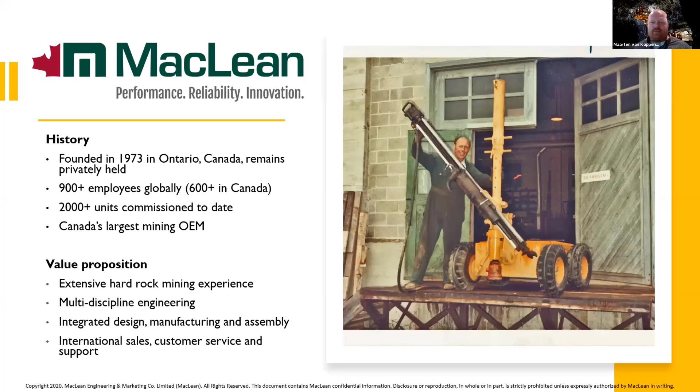We now have about 900 employees all over the world, and we've got over 2,000 rigs commissioned. All of our engineering is still in-house, and we still do a lot of the manufacturing in-house as well. We have, for the size of our company, a pretty significant inventory of spare parts. So that's sort of where we stand. We pride ourselves in providing solutions for the underground hard rock market, ranging from something we can produce in large numbers to one-offs as well. So that's basically MacLean in a nutshell.

As you would expect, we operate primarily in our own backyard in Canada, though we have locations elsewhere. We just opened up a branch in Elko, Nevada, plus South America, Australia, and particularly our Africa branch has been very successful over the last couple of years in expanding the business. So our center of gravity is starting to move a little bit across the border, which is good. And we've been growing quite a bit.

Part of the expansion is that we also now have our own test facility in Sudbury, a couple hours north of Toronto. It's a decline that we can use for our own internal testing, which is great. For a company our size, you kind of need a facility like that to work on your product development. We're happy to have this and run our tests.

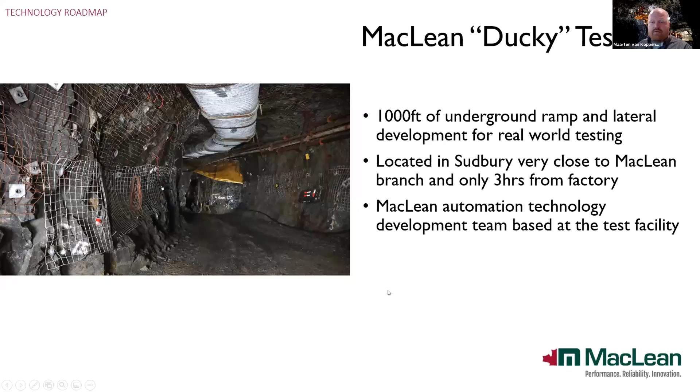So what do we do? We basically have three different product lines. They range from utility vehicles - boom trucks, etc., personal carriers, scissor decks. We have a ground support line, so we've got our famous platform bolter, a shotcrete rig line - sprayers, mixers, transmixers - and then our ore flow suite. So basically anything from a block holer, secondary ore reduction - I think is the technical term - to water cannons, rock breakers, scalers, that all falls in this category.

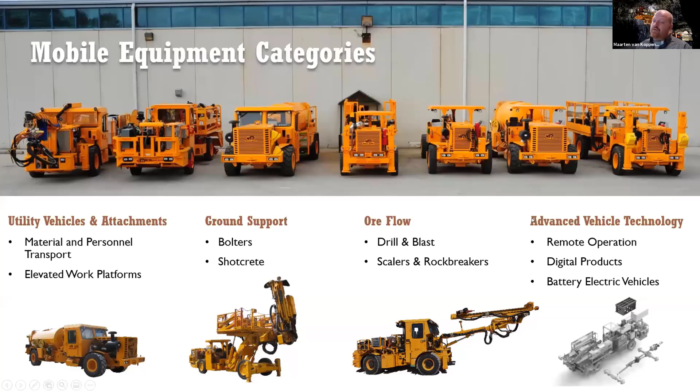What kind of goes over top of all three of those product lines is our advanced vehicle technology. The way we see it, we've got three verticals that touch on all of our products. From automation - this entails line-of-sight remotes all the way up to tele-remote and beyond. Then we've got our digital systems - that's our telemetry, but also our virtual reality training modules that we're coming up with. We just completed our Bolter virtual reality training kit, and also the interfaces with the operator on the machine. There's a lot of work that can be done there.

And then the one we'll focus on a little bit more is electric vehicles, which spans across all three product lines. We believe that ultimately, whatever the future might look like, we know it's going to look different than it is today. And we believe that all three of these verticals will help us move into the next generation of mining, whatever that looks like, with a pragmatic view. Yeah, we're quite keen on moving there. Like I said, whatever that might look like.

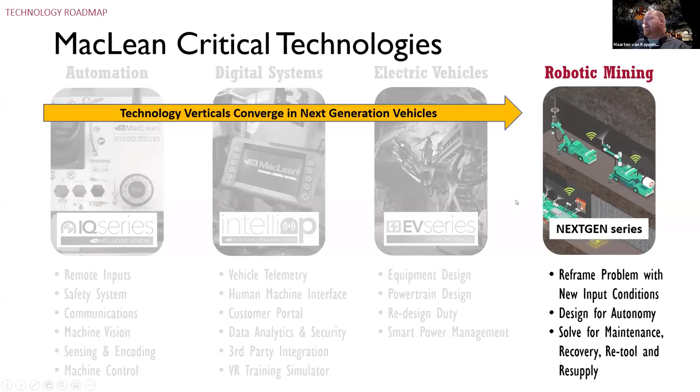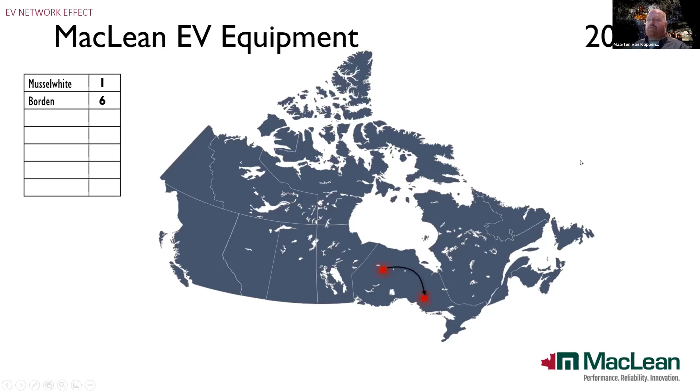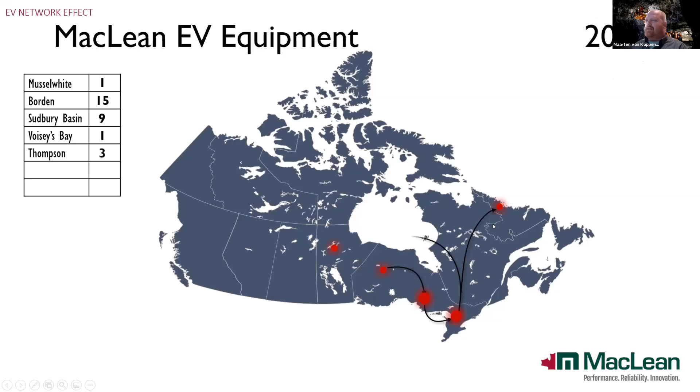When it comes to electric equipment, we started off with our first unit in 2016. It was a bolter that went to Musselwhite, and then Borden started in 2017 with 6 units. That turned into 15. We sold our first unit into Sudbury. That kind of expanded out to Voisey's Bay. Then we sold a couple in Thompson. Kidd Creek came along in Timmins, and we just completed a successful trial at New Afton in BC.

What we're kind of seeing is this network effect, where wherever we go, the good news tends to spread. The other good news and problem at the same time is that, for example, the unit that went to New Afton is our demo unit. We're seeing quite often that our demo units tend to stay at that site and get sold instead of moving around to different sites. So that's a really good problem to have, because we just need to keep building our demo units, I suppose.

So we're now at 9 different mine sites. We've got probably close to 40,000 operating hours since we launched, and we're just aching to get across the border now, to be honest. There's a lot of interest from various companies, and we're keen to move forward with this.

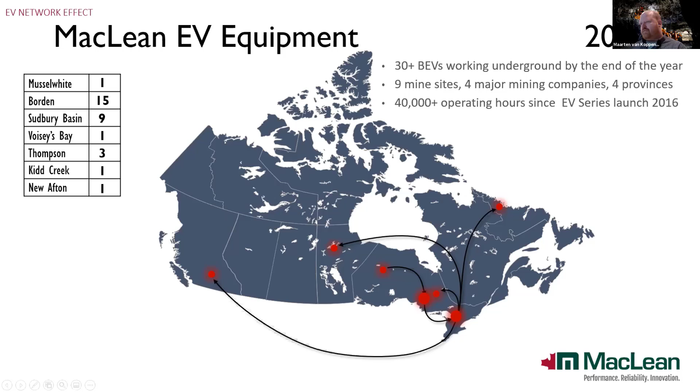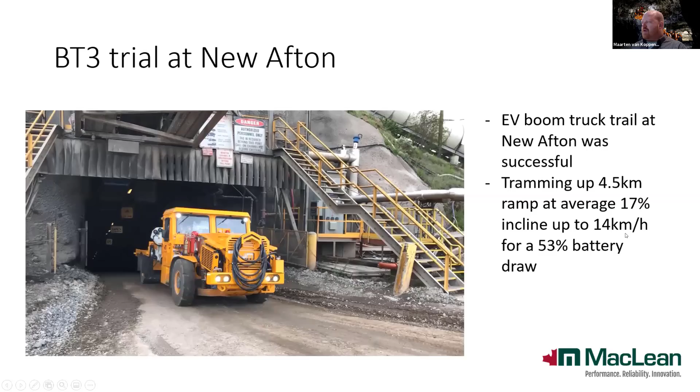The speed up the ramp was actually quite a bit higher than what they were used to with their diesel unit. At an average 17% incline, they were able to drive up the ramp empty at 14 kilometers an hour, which drew down the battery by just over half. Granted, it is a longer haul.

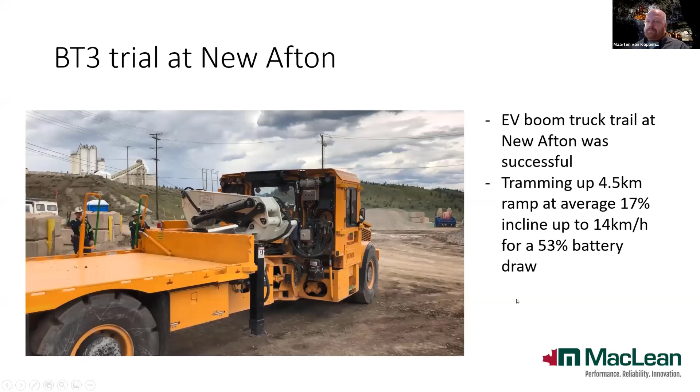So they were quite happy with it, and anecdotally the time saved on their way up the ramp was about 20 minutes compared to the diesel unit. If you do these trips often enough, it will add up, and that's something we've seen quite a bit with our customers.

The majority of our fleet right now is between 1.5 to 3.5 years old. And what we're seeing for battery degradation with the batteries that we have is a 2 to 5% degradation over that time period of just over 3 years.

We follow the battery manufacturer's recommendations that the battery should typically be retired at 20% degradation. I'm sure you can't quite extrapolate, but seeing these numbers makes us feel quite confident that these batteries should last for a good amount of time.

There's a bit of a difference between types of machines. Bolters are typically a little bit easier on the battery because they don't draw down as frequently, whereas with boom trucks you see that a bit more often. So that's where you see some of the differences.

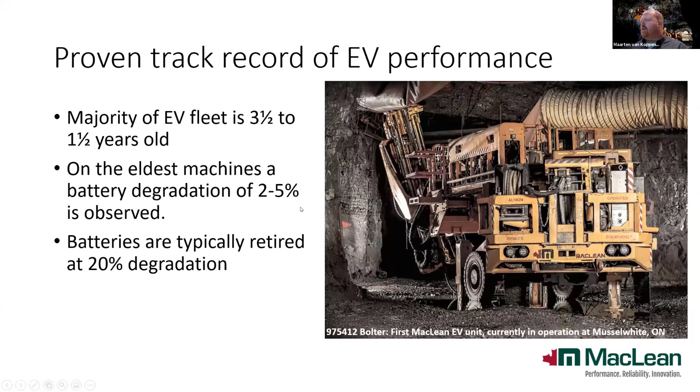In our view, what's nice about using utility vehicles is typically you go down the ramp loaded, so you can use that potential energy from gravity and put it in the battery to a large extent. And then when you unload, you go back up empty. That's a typical way of how machines operate, and so that makes it for a good case.

And then on top of that, in case of a boom truck, for example, if you spend 15-20 minutes unloading, that's a good opportunity to plug in while you're doing that and top up the battery. Every little bit helps. Our batteries don't have a memory, as do most chemistries, at least the more advanced ones as far as I know. So that makes it for a pretty good application.

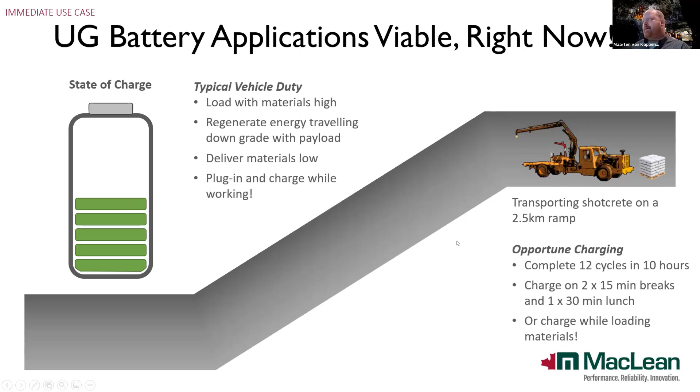In terms of what our basic design looks like, this would be sort of a common carrier. This black box here is the battery. We've got our onboard chargers, so you can basically plug in anywhere you have a jumbo plug, and they can be adjusted for the voltage you're looking at. Then we've got our power electronics.

They sit around here. Essentially, we took the diesel drivetrain out and replaced it with an electric motor. And then we have a little drop box here, or low transfer case, and that's how it works.

It also has a brake resistor, so that means that when you're at full capacity of the battery and you're still going down the ramp, you can burn off the energy through the brake resistor and create heat. Typically you don't want to see that because that's a waste of energy, really. Ideally you want to use that energy to store in the battery instead.

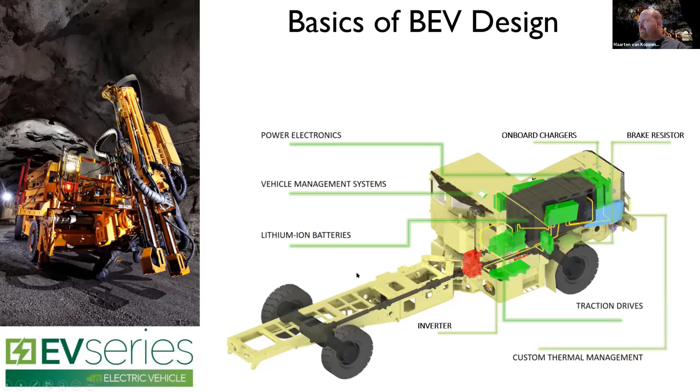On the vehicle, the way it works, at least in our case, is that we've got a continuous monitoring system through the battery monitoring system. That system just records all sorts of data on the battery, so voltages, ambient temperatures, voltage imbalances, etc.

Now, if there are any deviations from what we expect to see, those faults get reported up to the vehicle monitoring system. That vehicle monitoring system translates itself into an operator interface on the unit, and that allows us to warn the operator if there's an issue, or even provide feedback on how to better operate the machine.

Depending on the situation, the same goes for technicians. This screen also has the ability to kind of self-diagnose in a way, and we're continuously expanding on it to help the technician pinpoint what the problem is for speedier troubleshooting.

For the off vehicle, this is when the battery comes off the vehicle. Typically the battery stays in our vehicles, but when you do have to transport it for whatever reason, you want to make sure you still keep an eye on it. So we developed this little Pelican case that simulates a vehicle management system that we can store or ship with the battery to provide that continuous monitoring.

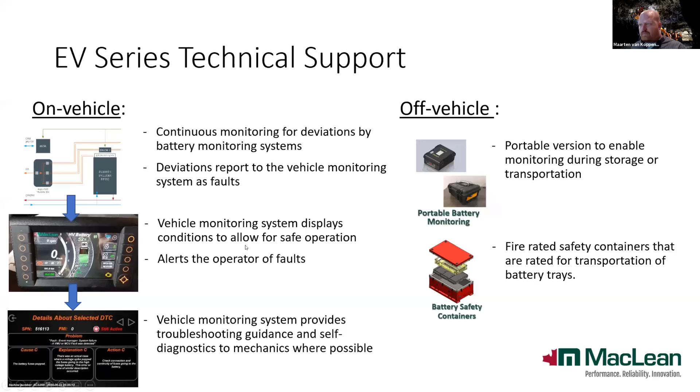I think one of the key things really is this whole view on data availability and using that data for risk mitigation. One of the things we've experienced is that if there's an issue, you get a lot of heads up. There's a lot you can learn from the data. Since we already have a lot of experience with this data, we've been able to set our thresholds a little bit better. The nice thing too is that when there's a fault detected on the vehicle, this data can be transmitted to our portal. Depending on the severity of the fault, that triggers a whole response mechanism within our company, so a lot of people are notified right away, so we can remotely troubleshoot it and make sure the customer is also aware, the data is shared.

Sometimes what we've seen is that we're seeing that data a little quicker than the customer because the customer might be working on other stuff. But nonetheless, there's an extra set of eyes on it, and this provides one of the best risk mitigations to battery safety concerns. That early detection and data availability.

The one thing I will caution, especially mine operators about, is that this link here between the underground mine and the worldwide portal, sort of on the internet, this can take quite a while to set up properly. Obviously there are some concerns about cybersecurity typically, so you'll want to make sure there's enough time to make sure that's sorted out ahead of time.

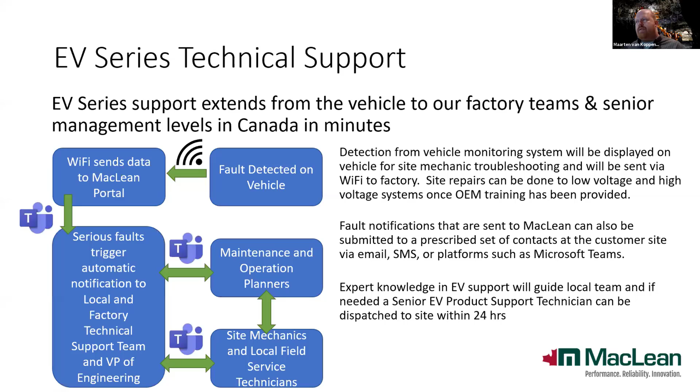That's it for this slide. So the next thing coming up is our new shotcrete sprayer. This is the SX3, and it's currently in the factory, the first version, and it will be tested a little bit later at our test facility. It's primarily an EV unit, an electric vehicle, though we'll have it available in diesel version as well.

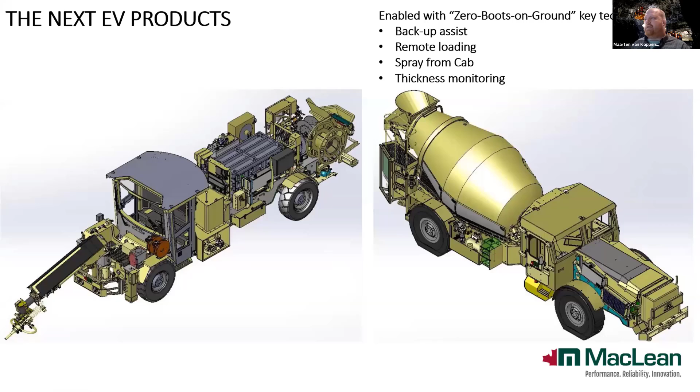And it's got a lot of really cool features. Aside from the electric part of it, we're looking to also have continuous thickness monitoring and a lot of features to make sure you don't need spotters to back up the transmixers into the sprayer. One of the cool things, I think, is also that you can use this as a concrete pumper truck. So basically these are the latest additions to our EV fleet.

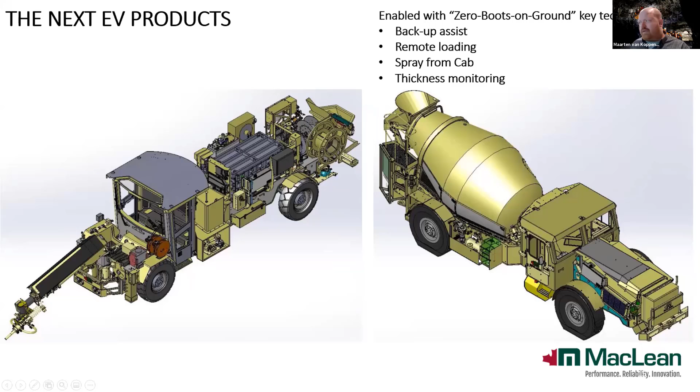And then on top of that, I think just in general, there's no such thing as a one size fits all. Right now we offer one battery and one battery only, with possibly some variations. But we're testing the same type of battery chemistry and product from a different supplier to augment our offering, so we can right size the onboard capacity for the application the customer needs. A case in point: a scissor lift typically doesn't travel very far. When it's working, it might already be plugged in, or it moves very slowly. So having a large battery on board is just a bit of a waste of capacity in a lot of cases. Whereas a boom truck, for example, traveling up a very long ramp, might be short on capacity. So that's what we'll be offering at the start of next year, after we're done with some internal testing.

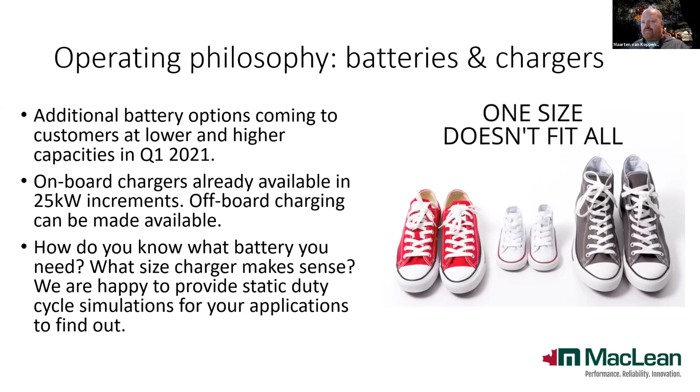And then we also have different versions of our onboard charging, just with different capacities available. And so in order to make sense of all of this, I see this as part of my role. We're more than happy to work with you to figure out what's the best size, to provide static modeling based on our operating experience, and find a solution that could work.

So those are some of the key things that are new and exciting within MacLean. Thanks for your time. Hopefully this was a useful little overview of what we're up to.